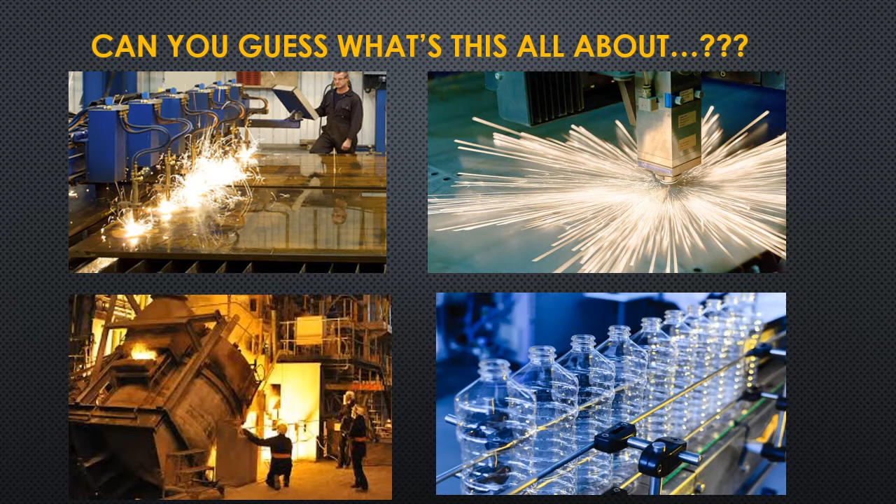So, can you guess what this is all about? I hope many of you may have heard about the term shaping or forming process, or about rolling, forging or extrusion. If not, let me explain to you in brief.

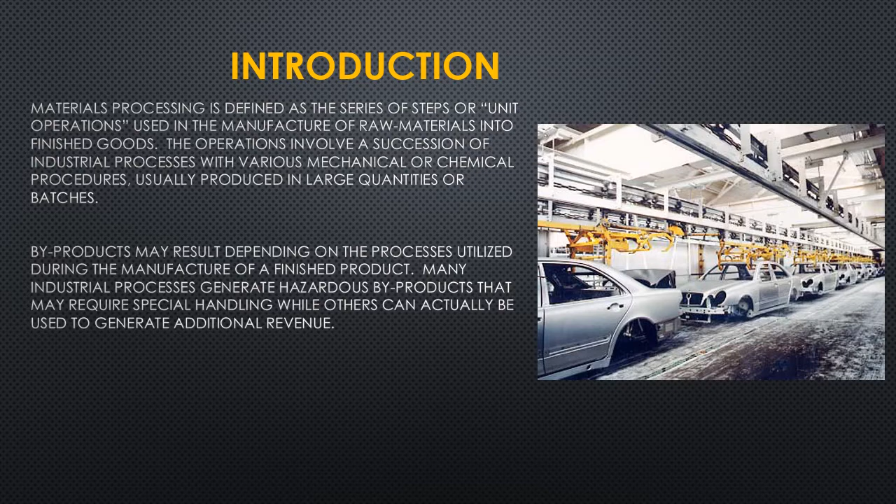Now, let us come to the types of material processing. The processes used for the manufacturing of a desired product generally provide two major functions: the formation or alteration of material. The formation of parts or products is usually achieved by molding, casting, or the application of pressure. The physical state or the composition of commodities and the product can be altered by a number of different means, including chemical, mechanical, and thermal operations.

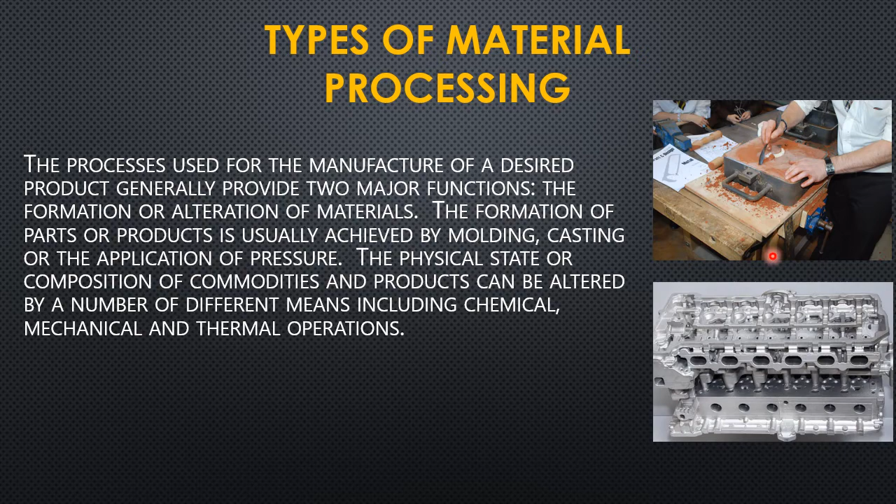Now, these processes can be applied to a variety of materials, and the applications include adhesives and sealants, agricultural chemicals, biomaterials, ceramics, composites, electronic materials, glass, metals and alloys, nanomaterials, paint, ink and coatings, personal care products, pharmaceuticals, plastics and polymers. The pictures are given here for your reference.

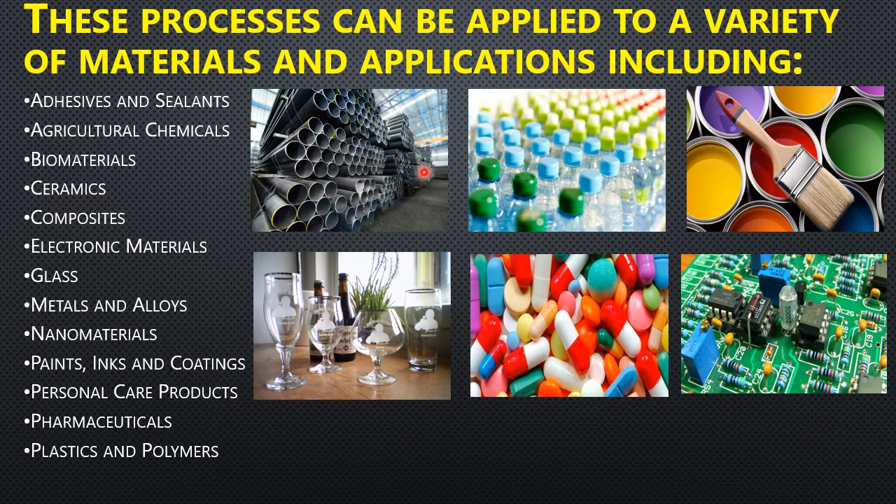Now, let us take the example of a steel plant. The raw materials required to manufacture steel are coal, iron ore, and limestone. The three raw materials used in making pig iron, which is the raw material required to make steel, are processed iron ore, coke, and limestone, that is CaCO3, or burnt lime, that is CaO, which are added to the blast furnace at intervals, making the process continuous.

The limestone or burnt lime is used as a fluxing material that forms a slag on the top of the liquid metal. This has an oxidizing effect on the liquid metal underneath, which helps to remove impurities. Approximately 2 tons of ore, 1 ton of coke, and a half ton of limestone are required to produce 1 ton of iron.

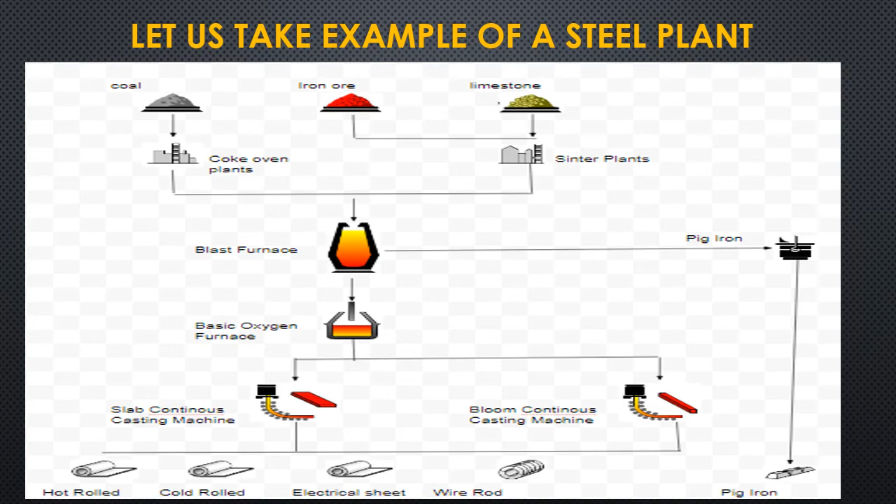The steel can be further converted into different forms, that is slab, billet, and bloom. The slab can be converted into further different forms, that is plate and hot rolled or cold rolled. The billet can be converted into hot rolled bars, rods, and tube rounds. And the bloom can be converted into structural shapes or rails.

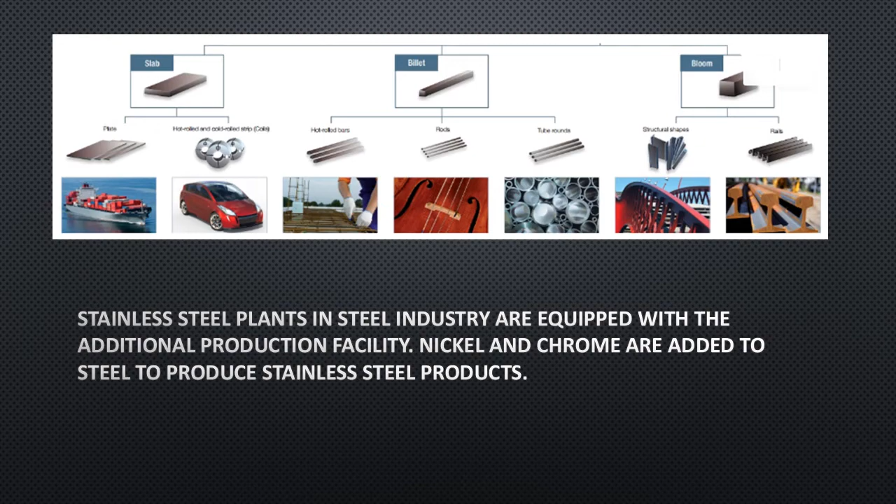Stainless steel plants in the steel industry are equipped with additional production facilities. Nickel and chrome are added to the steel to produce stainless steel products. For example, these are used in kitchen appliances, medical equipment, exterior walls, and roofs of buildings. The sheet steel is used to manufacture the bodies of cars and automobiles.

Now, let us come to safety, which is the top priority in every industry. So, what is process safety? Process safety is a disciplined framework for managing the integrity of operating systems and processes handling hazardous substances by applying good design principles, engineering, and operating practices.

So what is process safety and what does it do? Basically, it deals with the prevention and control of incidents that have the potential to release hazardous material or energy. Such incidents can cause toxic effects, fire, or explosion and could ultimately result in serious injury, property damage, loss of production, and environmental impact.

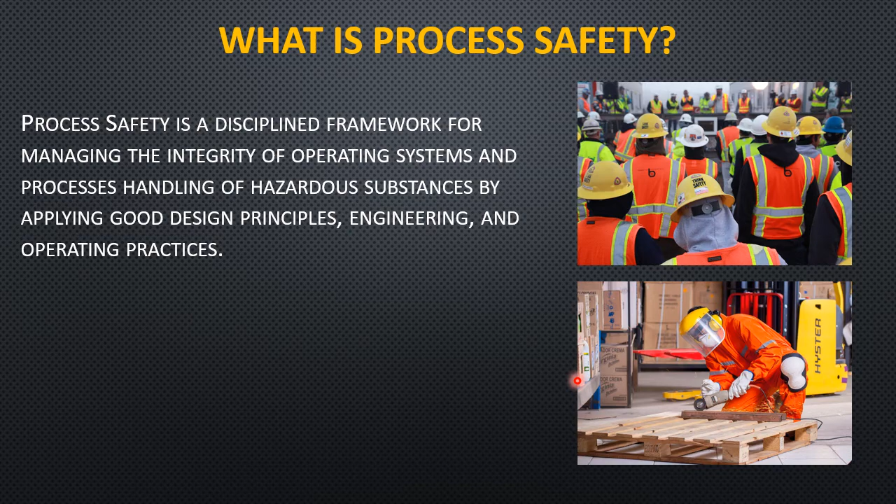Here, as we can see in these two images, in both images the workers are working in proper PPE, which is actually a very good practice.